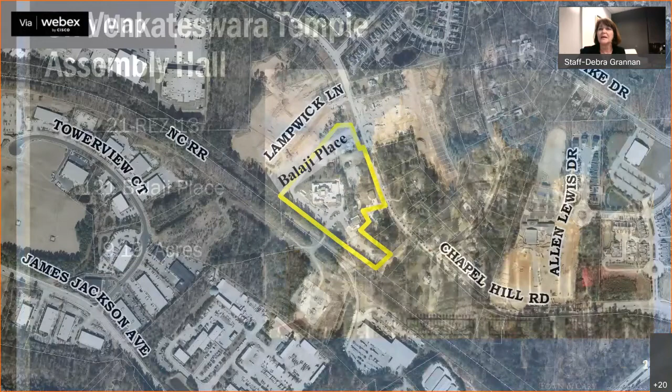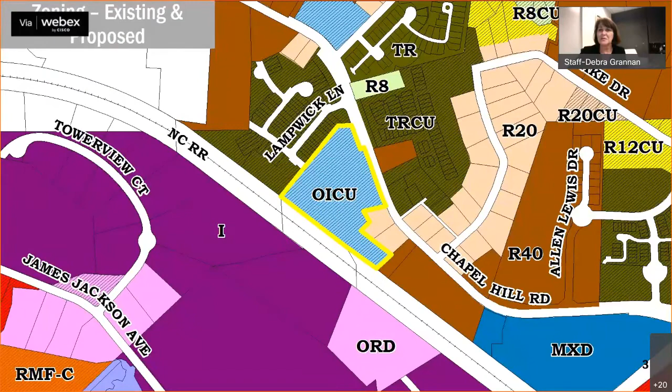Thank you very much. Good evening, board members. For your consideration this evening is a request from the membership of the Venkateswara Temple. They're seeking an amendment to existing zoning conditions to the property as they continue their efforts to meet the growing needs of the community. The subject property is located at 121 Balaji Place, adjacent to the 9400 block of Chapel Hill Road. The property is zoned office and institutional conditional use, and that designation would remain in place, but there are new and modified zoning conditions proposed for the site.

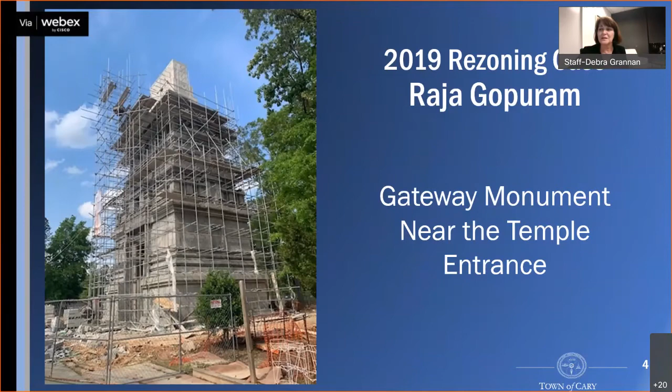As you may recall, two years ago you recommended approval of the request for the Rajagopuram, an elegant gateway monument near the temple's entrance. There were multiple zoning conditions that restricted sound and lighting, prohibited telecommunication equipment, and limited the height of this monument. Those conditions are not going away, but the membership of the temple is seeking to add an assembly hall to the property so that they can facilitate weddings and religious education opportunities on the site.

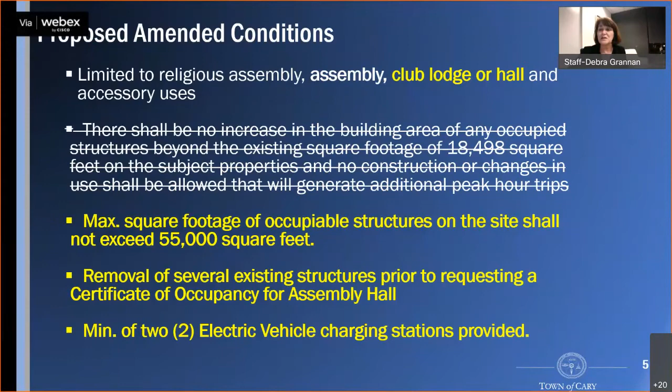So to achieve this, they've added club, lodge, or hall to the list of permitted uses. They've proposed that the maximum square footage of occupiable structures on the site will not exceed 55,000 square feet. This would include the existing temple, but allow for construction of a new marriage hall or assembly hall. To stay within the square footage limits, the applicant has offered to remove several existing structures on the property. Finally, the applicant offered to provide 2 electric vehicle charging stations on the property.

On this next slide, you'll see the areas circled in red that show both those houses I just showed you and several small storage buildings and structures not visible from the street. Removal of these structures will add to the aesthetics of the site as well as the functionality in terms of where that marriage hall and assembly hall can be located.

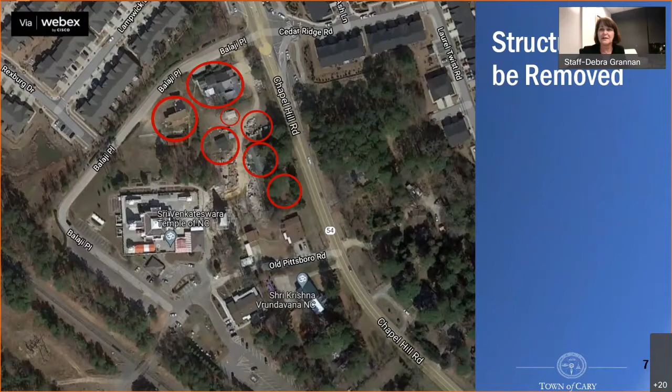In staff's review of the request against the policies of the Imagine Cary Community Plan, we find that the work, shape, move, and serve chapters are most applicable. This would expand cultural assembly opportunities that help support a diverse workforce in our community. The project represents redevelopment along a highly visible corridor. Road improvements will be required as part of the development plan, and that's going to help improve safety on Chapel Hill Road. By providing electric vehicle charging stations, that zoning condition might help improve air quality. The Imagine Cary Future Growth Framework Map identifies the property as being in the traditional neighborhood category, and religious assembly use is appropriate in that category.

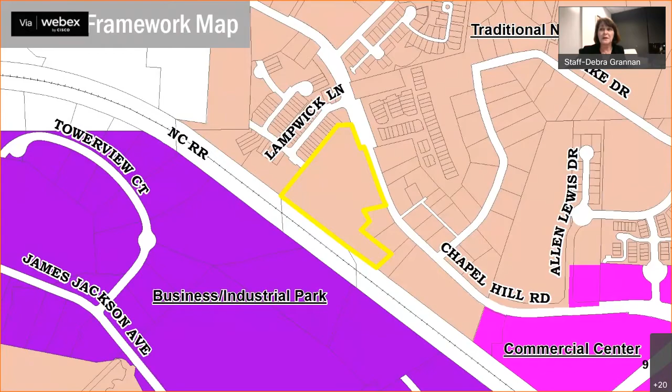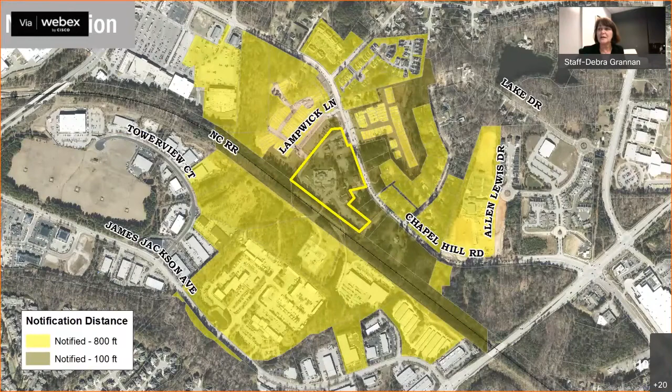Property owners within 800 feet of the subject property were notified by mail, and that exceeds both the state and the land development ordinance requirements. Information about the public hearing is on the Town of Cary website. The property was also posted with public hearing notices along Chapel Hill Road.

Staff facilitated a virtual neighborhood meeting on October 6th. There were 25 people plus the applicant and staff in attendance. Most attendees voiced support for the use, but there were concerns addressed about traffic on Chapel Hill Road, congestion at the entrance to the temple, and the observation that sometimes visitors to the temple park in the adjacent neighborhood.

So the applicant has met with those citizens on more than one occasion. Since the public hearing, staff also received 2 emails from citizens offering additional comments and concerns related to traffic. But we had multiple emails, close to 40, from citizens offering support for the proposed assembly hall, since it provides opportunities for both the marriage ceremonies I mentioned and Sunday school classes.

In reviewing the proposal, staff finds that this request is consistent with policies of the work, shape, move, and serve chapters of the Imagine Cary Community Plan, and staff recommends approval of the request. This concludes staff's presentation. The applicant's representative, Glenda Toppe, is available for comments and questions, and then I will be available for your questions following her remarks.

Ms. Toppe? Let's see if she's still here. I'm muted. There you go. You're back. Okay, I'll start again.

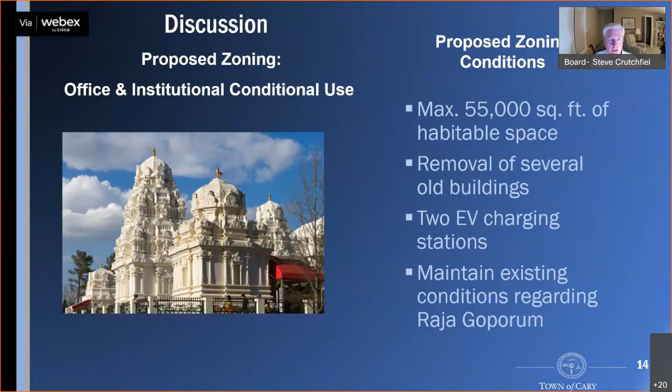Are there any development plans by the state to widen Chapel Hill Road, period, all the way down to like Morrisville, for example, or is that still something the state doesn't even have ready to go?

Yeah, we don't know of any definitive plans on that, as is always the case in Cary. Our first resource is to get the developer, when they're making site improvements, to make associated road improvements at the same time. The temple does own some additional land to the east, and if and when they develop that property, they'll be responsible for doing road improvements there as well. There are some little gaps in the property where there's a couple of houses just to the west of Balaji Place. So it may be a while before we get that complete road network widened to its ultimate build out, but we are doing it incrementally with development. But there's not a plan in place right now for DOT to make changes out here.

Okay, thank you. That's all the questions I have. Does anyone else on the board have any questions that we didn't get earlier?

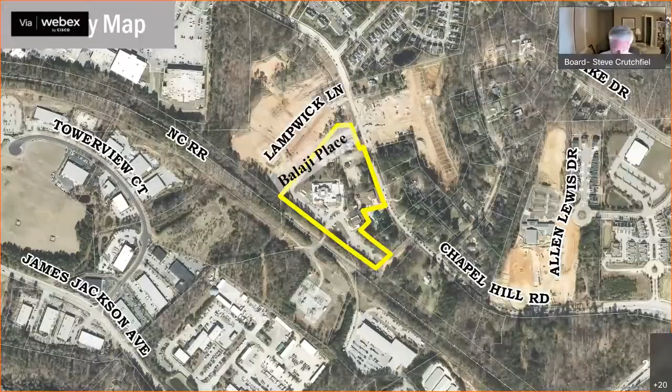Okay, if not, is someone prepared to make a motion for 21 REZ 13, the Sri Temple? I think this is Don. I'll make a motion. This is Don, I'm prepared to make a motion.

Thank you, Don. I move that the board find case number 21 REZ 13 is consistent with the comprehensive plan and all other applicable plans for the reasons set forth in the staff report, presentation, and discussion by the P&Z board.

Okay, thanks. So would someone like to second? This is Mike, I'll second. Thank you.

Don, since you put this forward, what are your thoughts on this? We've really hit on it tonight. I agree that this is really the gateway coming from that side of town, and I think removing a lot of that stuff will really improve the appearance. So I'm basing most of it on the shape chapter.

Okay, and Jeff, do you have some additional comments to make on the motion? No, I second the motion. Being newer on the board, I'm trying to remember my various implementations to the plan. But serve and inclusion, obviously, this is an opportunity to continue to be inclusive of a number of individuals, and I'm supportive of the motion.

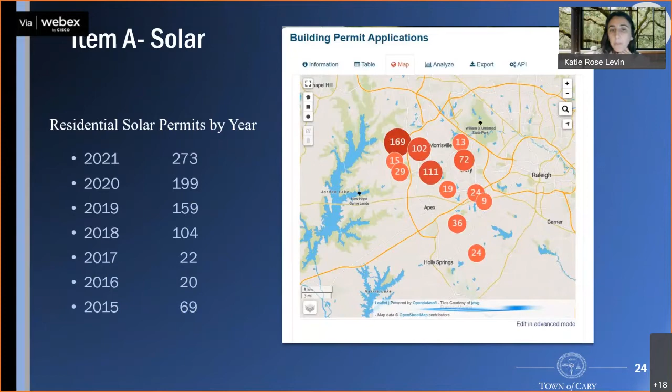This update is the next step forward in the SolSmart certification program and clarifies that solar systems can be installed as an accessory use anywhere in Cary. So item A further supports Cary's already strong interest in solar, and we hope that residents will continue to be inspired to utilize this green technology for their own home. Next slide, please.

Item B, environmental policy statements. Trees, landscapes, and natural lands provide tangible benefits to Cary citizens, many of which...

I apologize, I'm having a little bit of network connectivity issues. I hope that y'all can still hear me through that. Trees, landscapes, and natural lands provide tangible benefits to Cary citizens, many of which are listed in various sections in the LDO. Over time - can you go to the next slide, please?

Over time, research has revealed more benefits than are currently listed and are important to the welfare of Cary citizens. Thus, item B adds many of these new benefits to the list. Benefits that are going to be added to the various lists include shade, carbon capture, lower temperatures, stormwater abatement, and human health. Adding these benefits makes our lists and policies surrounding trees, landscapes, and natural lands more accurate and responsive to current scientific understanding. Next slide, please.

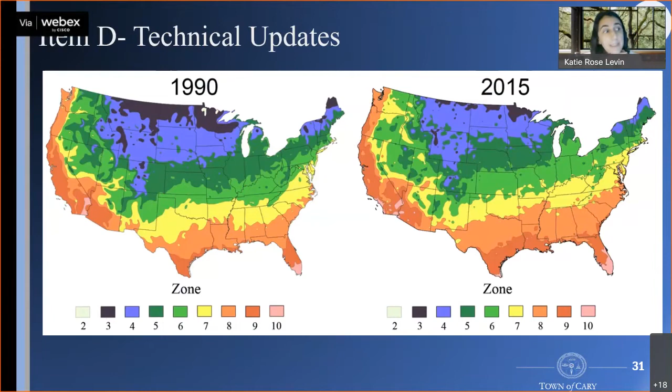During the public hearing, citizens spoke in support of the updates, particularly the positive impact on native bird populations, and urged for further actions and updates to the LDO.

Questions and comments from council: generally they were very supportive of these changes, talked a lot about how this is where they see the LDO going, and looking forward to more changes, particularly surrounding plant materials and programs and actions around plants.

They also talked a bit about solar. They asked if solar shingles would be allowed with this new update, and staff replied in the affirmative. They asked how we could continue to expand our solar programs, including looking at supporting EV through partnerships or other types of programs like that.

So after the public hearing, we made several more changes. We further refined the species list and pulled out the allowable planting list into a separate table for understory trees, so it was easier for developers to reference. We also updated an understory tree definition with associated species updates.

We highlighted the volumetric soil calculation for trees, which was in there originally but wasn't pointed out as a particular change. This was done because currently the soil volume required for trees is stated in area, as opposed to volume units—area being 2D, volume being 3D—so we reconciled that. We also added human health as a benefit provided by trees and vegetation; multiple citizen commenters requested that addition. We corrected additional grammatical errors within the text.

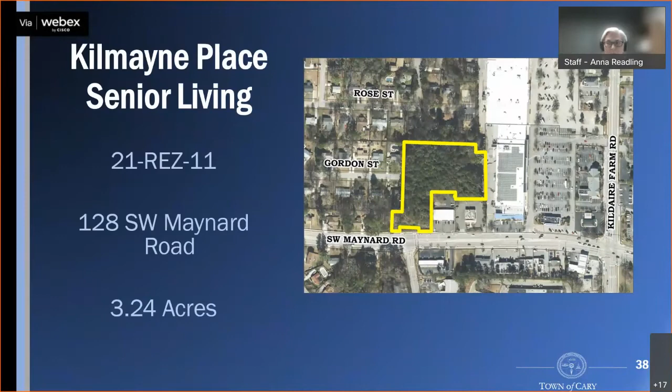The property has frontage along Southwest Maynard Road, but the main portion of the site sits back from the road behind a small commercial strip center. To the east is the Mayfair Plaza Shopping Center, and you've probably seen the Glenaire expansion project going up there. And you can see Kildaire Farm over to the east. To the north and west is the Burtrose subdivision. Just above the northeast corner is Rose Street Park.

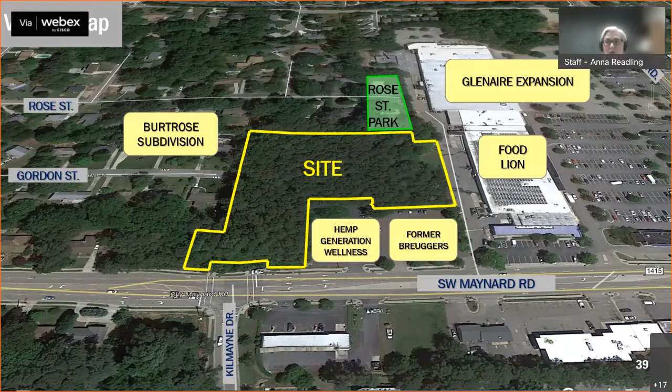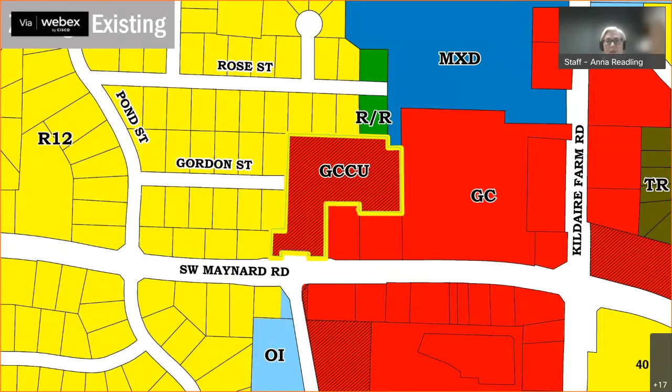The current zoning is general commercial conditional use with the following commercial uses prohibited: veterinarian offices with outdoor kennels, indoor and outdoor kennels, nightclubs, bars, hotels, or motels. The zoning conditions also require increased building setbacks from adjacent residential properties.

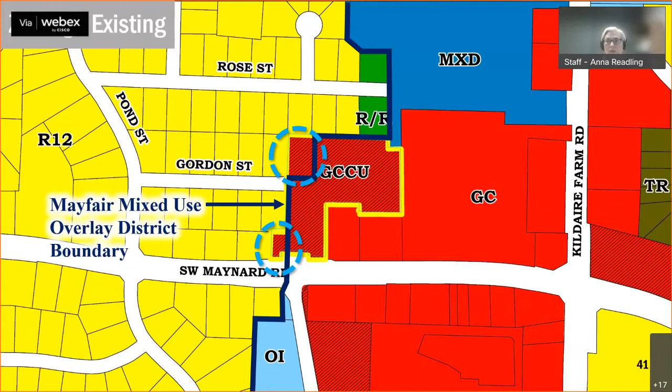The majority of the property also falls within the Mayfair mixed-use overlay district. Two corners of the property fall outside of the mixed-use overlay. The applicant is requesting to rezone the property to mixed use and to extend the mixed-use overlay boundary to fully align with the property boundary.

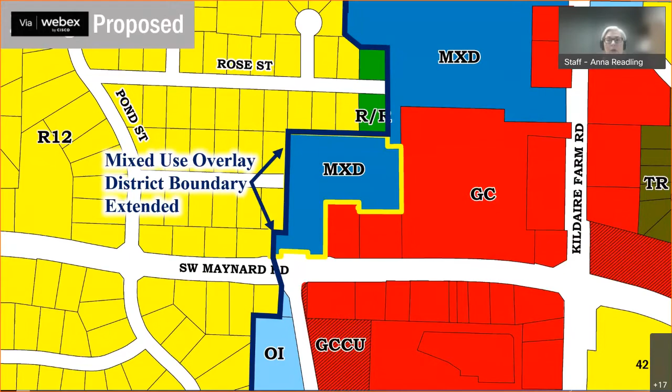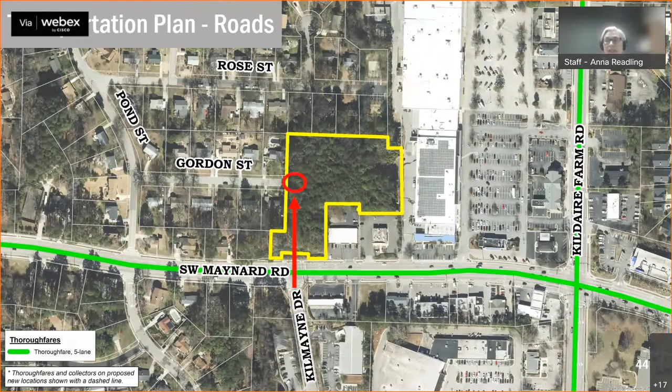There are no greenway corridors within or adjacent to the site. The subject property abuts Southwest Maynard Road, a 5-lane thoroughfare. Kilmayne Drive, a local street, is located directly across Maynard Road from the property. If this rezoning is approved, the project developer will extend Kilmayne Drive to provide access into the property and construct a roundabout to connect the Kilmayne Drive extension with Gordon Street.

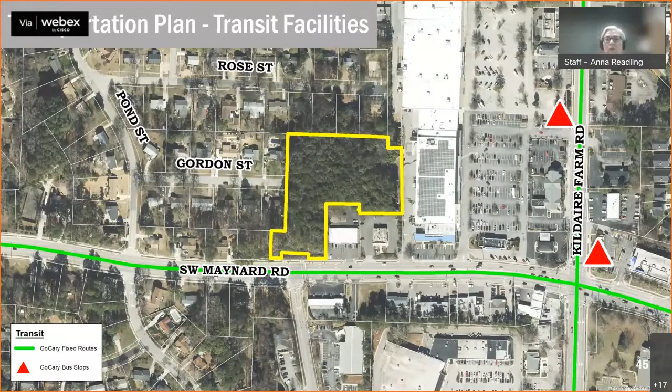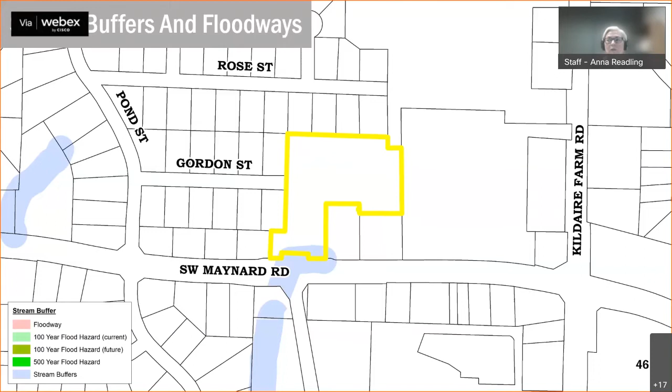Cary's GIS maps indicate the possible presence of a stream on the extreme southern portion of the subject property adjacent to Maynard Road. Field determination will be required at the time of development plan review.

Because the request is for MXD zoning within a mixed-use overlay district, the applicant has submitted a preliminary development plan with conditions and standards unique to the subject property. The conditions as presented at the Town Council public hearing are as follows: the use of the property will be limited to 84 age-restricted multifamily units, the maximum building height will be 49 feet or 4 stories, and the developer will record covenants requiring at least 80% of the occupied units to have a resident aged 55 or older. Since the public hearing, the applicant has offered these additional conditions.

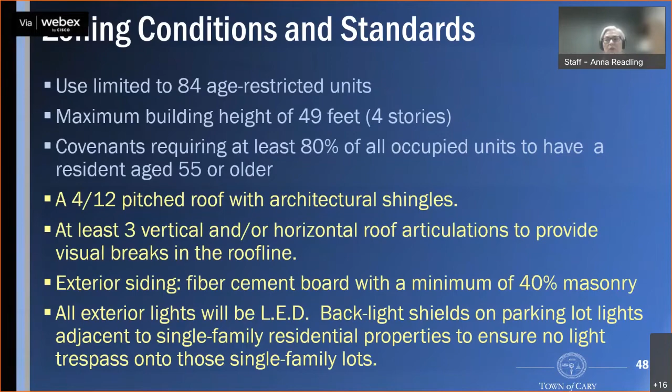The roof will be a 4-in-12 pitched roof with architectural shingles and at least 3 vertical and/or horizontal roof articulations to provide visual breaks in the roof line. The exterior siding will be fiber cement board with a minimum of 40% masonry, which is 5% more masonry than is required by the Community Appearance Manual. All exterior lighting will be LED, and parking lot lights adjacent to the single-family residential properties will have backlight shields to ensure there is no light trespass.

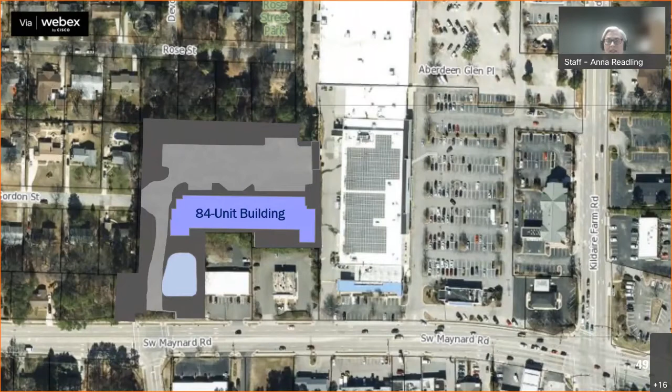This is an overview of the preliminary development plan showing the site layout and the proposed site development standards. The 84-unit apartment building is accessed by Kilmayne Drive extension and the roundabout at Gordon Street. The building overlooks the parking lot located here.

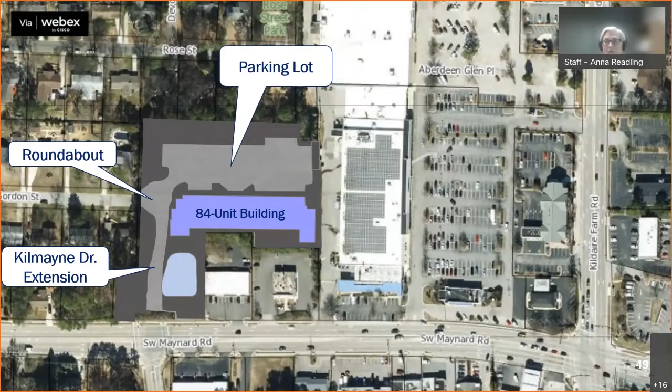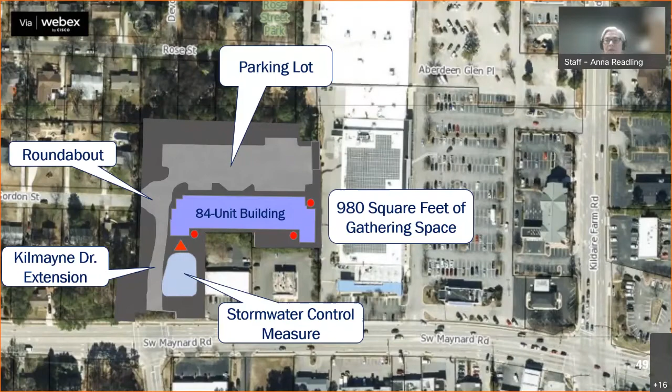The LDO requires 600 square feet of gathering space for sites under 5 acres, which this is, and the applicant is proposing a total of 980 square feet of gathering space distributed over 4 locations. Three of the gathering spaces each contain bench seating and a patio. The red triangle represents a fourth gathering space with a pavilion. The stormwater control measure will be located here. A tree survey has revealed there are no champion trees located on the site.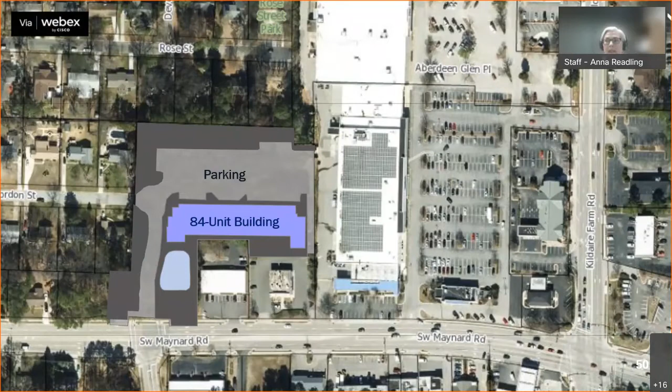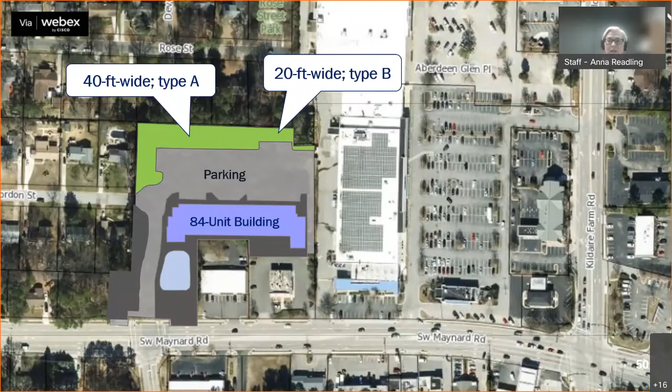The applicant has proposed buffers that meet or exceed LDO requirements. There will be a 40-foot wide buffer on the north end adjacent to residential, a 20-foot wide buffer adjacent to Rose Park. No perimeter buffer is required along internal property lines within a mixed-use overlay district, but the applicant proposes a 10 to 17-foot wide buffer with evergreen plantings here. The buffer was originally 10 feet wide at the public hearing, but since then the applicant has found room to increase it in places by 2 to 7 feet.

There will be a 50-foot wide streetscape along Maynard Road and streetscape plantings along the west side of the Kilmaine Road extension, which as a local street isn't actually required to have a streetscape, but the applicant will put some there.

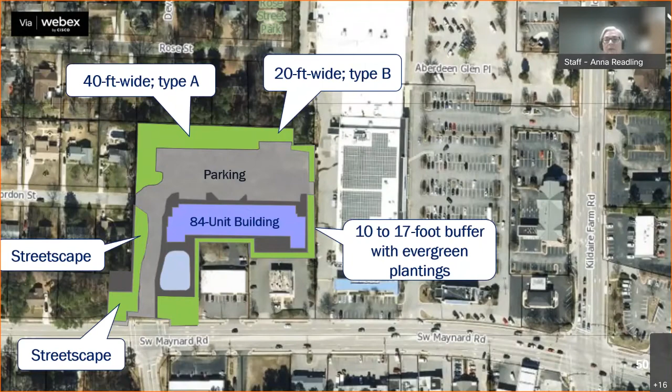The applicant's proposal also includes 2 modifications of LDO standards. First, the applicant is requesting the ability to clear and replant as necessary the streetscape along Maynard Road due to very uneven existing topography, as well as the grading necessary for the Kilmaine Road extension. The LDO requires preservation of existing healthy trees in buffers and streetscapes unless there is justification for removal.

Second, the applicant is proposing a parking rate of 0.75 space per bedroom. Cary's recently completed multifamily parking study recommends a rate of about 1 space per bedroom for multifamily residential, with an additional 0.15 visitor spaces per unit, though the study didn't differentiate between age-restricted and non-age restricted multifamily complexes.

On the future growth framework map, the subject site— oh, I'm sorry, I think I may have— I'm sorry, could we go back? I left off some important information. So we're still talking about the parking.

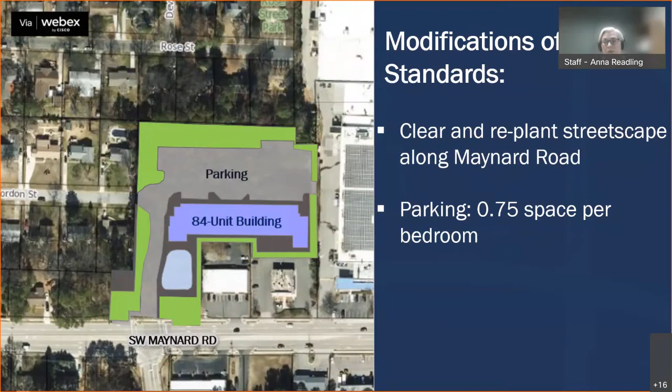The applicant has submitted data supplied by the project partner, Beacon Management Corporation, a company that owns and manages apartment communities. Beacon Management surveyed 10 age-restricted apartment developments to determine each development's parking to unit ratio, and believes the data justify the proposed rate of 0.75 space per bedroom. Those surveys were included as an attachment to your staff report. And now we can go forward.

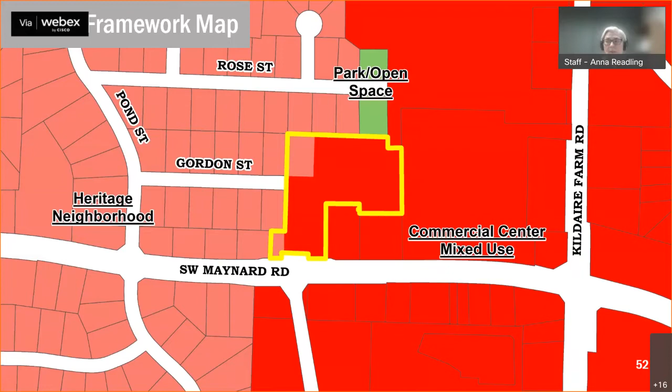On the future growth framework map, the subject site is located primarily within a commercial mixed-use center, with 2 areas on its western perimeter located within the heritage neighborhood category. Heritage neighborhoods, such as the Burt Rose subdivision, were built during Cary's first suburban boom, 1960s to the early 1980s, and usually have a wide variety of housing types and densities.

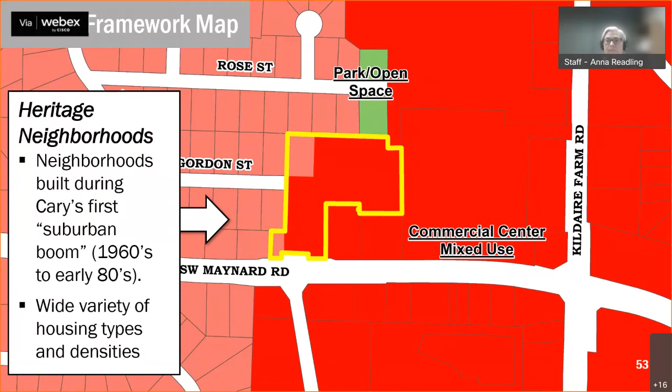Commercial mixed-use centers should be compact, walkable, and have an integrated mix of commercial, office, and residential, 3 to 7 stories, transitioning down to 2 to 3 stories. Uses may be mixed both vertically and horizontally.

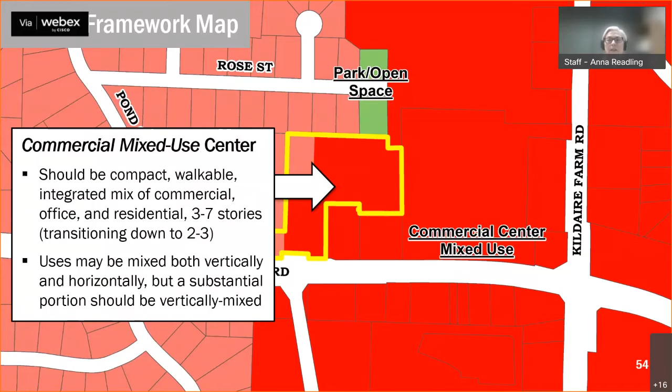This slide shows the site's location on the western edge of the Mayfair Commercial Mixed-Use Center. The proposed project, with a maximum building height of 4 stories, would add residential density needed for a successful commercial mixed-use center. Its location at the edge of the center also means the project would serve as both a use and visual transition to the adjacent Burt Rose neighborhood.

Commercial mixed-use centers should have a well-defined and interconnected street and pedestrian network. The Kilmaine Drive extension and the roundabout will provide additional connectivity. Sidewalks along the street will provide pedestrian access into and out of the site. Residents may walk to a park, shopping, and the bus stop at Mayfair Plaza via sidewalks. Additional services and shopping opportunities are available along Kildaire Farm Road, but would require crossing busy thoroughfares.

Mixed-use centers should have an active pedestrian realm where buildings front streets, but in this case the parcel has very little existing frontage on Maynard. The side of the building would front the Kilmaine Drive extension, with its main entrance facing north toward the parking lot.

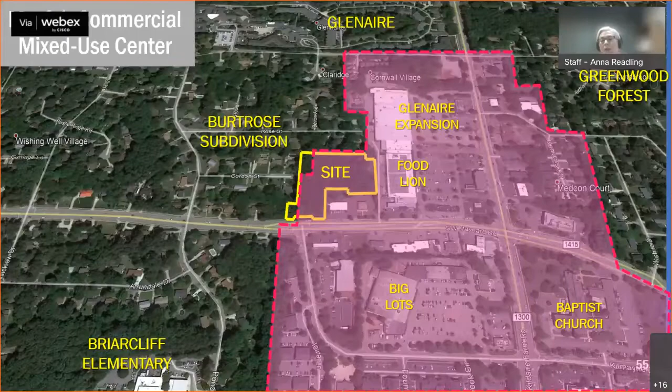8 property owners attended the virtual neighborhood meeting in August, and 3 citizens provided additional comments following the meeting. Concerns included stormwater drainage, clearing of trees next to the houses, height of the building, light impacts, loss of backyard privacy, construction noise, and potential for construction traffic and heavy equipment parking along Gordon Street during construction.

The Town Council public hearing was held on October 21st, and 2 citizens spoke. The first speaker expressed concern about the building's proposed height, but said he appreciates the developer's communication with the neighborhood, which he felt had been good. The second speaker expressed concern about noise from construction, but said she felt the proposed use is a good one.

During council discussion, there was general consensus among council members that the proposed use is good and will provide a good transition from the commercial uses at Mayfair Plaza. But there was also consensus that more zoning conditions were needed to demonstrate how the project would complement the neighborhood.

Council members also expressed a desire to see mature trees left in the buffers, especially where adjacent to residential; a desire to see neighbors' concerns about lighting spillover addressed; a desire to see the buffer next to the commercial on the internal property lines beefed up if possible, although it was acknowledged it was a very tight site; a concern about the aesthetics of the future stormwater control measure, as it is front and central there; and a desire to see more effort made to address environmental policies of the SERVE chapter.

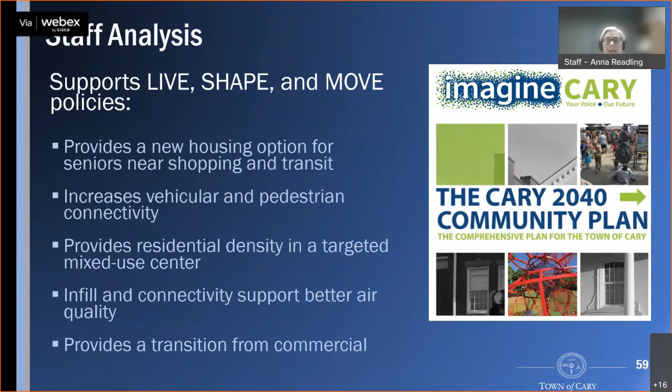Based on this analysis, staff's preliminary finding is that the requested zoning and the conditions offered appear to be consistent with the Imagine Cary Community Plan. This concludes my presentation, and I believe the applicant, Doug Letson, is present and will provide comments.

Thank you all for reviewing this. I've had this property for quite some time, been going back and forth. Many of the neighbors will testify that I've been doing everything I can to my best to try to accommodate them, and that's why you haven't seen any heavy commercial move forward on this. You saw what is allowed, up to 7 stories depending on how far you are from the residential. We're quite a bit below that.

But the key thing here is the type of use. In reality, we're down-zoning. We're going from what could be a heavy commercial use, with the exception of those 3 exclusions, to not just an apartment but a senior development. With senior developments, you have a lot less traffic. The other thing is because they're not going to work, they're not filling the roads when there's heavy traffic. That's the other thing we see as a benefit.

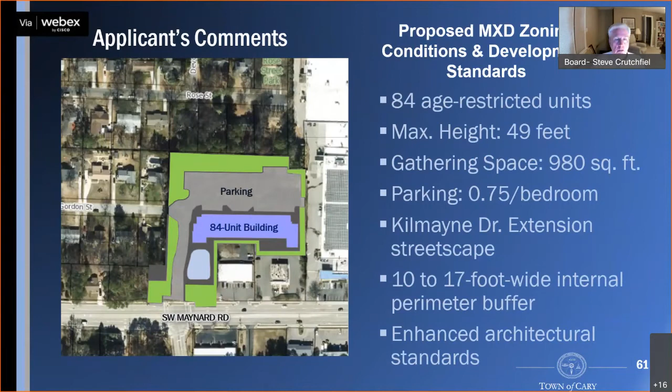Okay, thank you very much for the presentations. Board members, as we previously discussed, when you're asking your questions, please keep the community plan in mind. And when you're making your motions, try to tie them back into the applicable chapter that you think fits your motion. Having said that, we're going to open the board for questions and comments. Let's start with Don Hamilton for any thoughts.

Thank you. To lead with, I really appreciate the pictures that staff showed. It really helped me understand a lot of what was going on. The biggest question I have is, we don't rezone it. Under the current rezoning, what is the building height max? The present is you can go from 3-story to 7-story, depending on how far you are away from the residences.

Well, if I may clarify something there, I think that when I mentioned the 3 to 7 stories, that is what the Cary Community Plan envisions in a mixed use overlay, mixed commercial area with as the highest, and then looking at transition properties to be lower. Now that's what the plan envisions for these types of mixed use areas. Now, the zoning is a different matter, and that is commercial, as you pointed out. I'm going to look it up right this minute. I have it, and I'll tell you in just a minute what the height in commercial could be. That's my only question, I appreciate it.

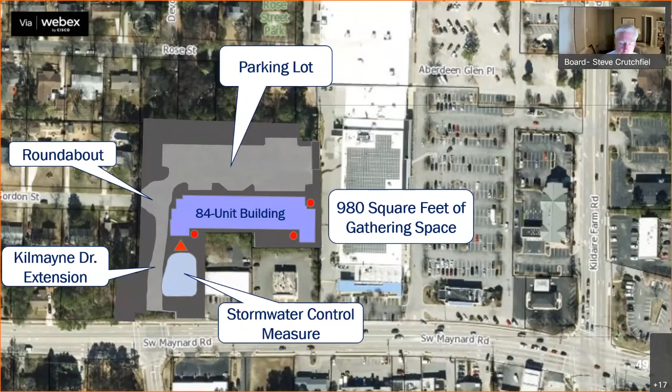The roundabout that's included in the plan, I couldn't tell from reading through the lots and lots of documents, but was that something recommended by the Town of Cary? Is that something that came from the planning group? That came from the planning department, Cary Planning. They specifically wanted that in transportation. Okay, that's what I thought. If I could add to that, I think that was actually a transportation department recommendation due to the traffic calming it would offer, but planning wasn't opposed to the idea.

Okay, no, that's good, there's a lot of benefits there. I could also see that for some of the folks in the neighborhood, that's going to be an increase in traffic back and forth, which may be less than what a commercial property would offer. So maybe that's a good thing. No, that's my one question.

The only other comment, I guess this will be something that the town council will deal with and approve. Obviously the parking seems a little bit ambiguous regarding the specifics on the recommended amount of parking, and understanding this is for a community that probably won't have as many cars, that's the one area that stands out to me, that it does not meet the recommended number of parking spaces for a community with 84 units. I understand you've done the study and read the comments there, so that's my only real concern.

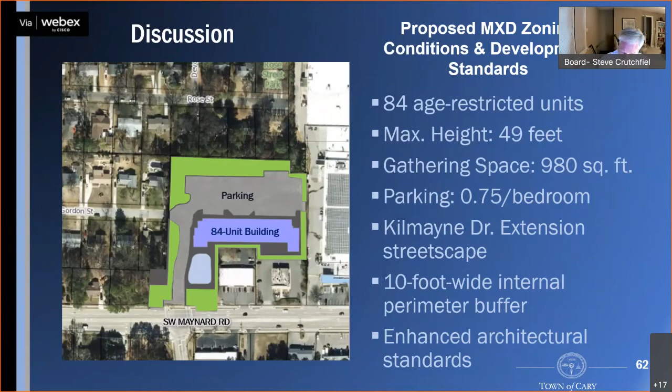So with that, we're going to close the comments from staff and the applicant. And I'm going to ask the board if there is someone that would like to make a motion for 21 REZ 11 Kilmayne Senior Living rezoning. The suggested wording is up on the screen.

Yeah, Steve, this is Jessica, I'll make a motion. I move that the board find case number 21 REZ 11 is consistent with the comprehensive plan and all other applicable plans for the reasons set forth in the staff report, presentation, and discussion by the Planning and Zoning Board.

Thank you, can I get a second from someone? I'm sorry, I missed that, I think that was Mike Roselli who seconded it. Thank you, Mike.

Okay, Jessica, let's begin with you for just the final comments behind your motion. Yeah, so I appreciate the comments from all the board members in the discussion, but the reason...

I decided to make the motion that it is consistent is because I do believe it's an appropriate use and that it provides a new housing option for seniors that's close to shopping and transit, as Ms. Readling described in the staff report. It's also an infill site in a mixed-use center, and so that's a positive. It also promotes network connectivity consistent with the MOVE chapter. And finally, I always appreciate it when applicants add additional zoning conditions after meetings with the neighborhood, and they did add enhanced architectural features. So for those four reasons, I do think that this rezoning is consistent.